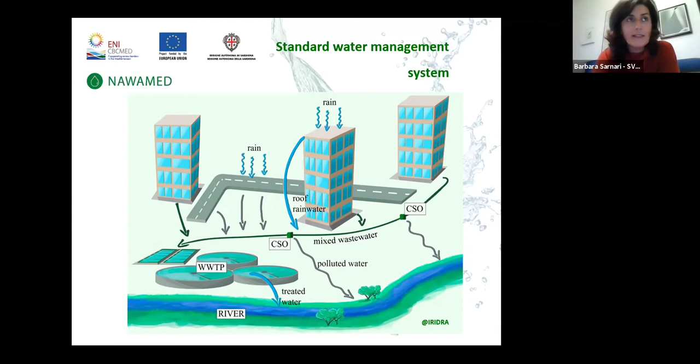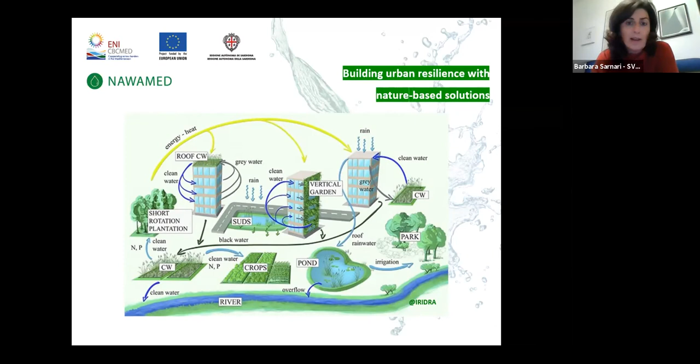So our final objective, which this project is just a part of, is to try to make this whole process more circular, reusing directly at the building and urban level the non-conventional water that is easily not so polluted, such as grey water or rainwater.

In particular, what we will try to demonstrate with the NAWAMED project is to reduce the use of potable water for secondary reuse, supplying at the project level about 9,000 cubic meters per year of non-conventional water that can be used, reducing the use of potable water.

The specific objective is to demonstrate the technical and economic feasibility of nature-based and low-cost solutions to treat and use non-conventional water resources in schools, universities, public facilities, or, as will happen in Lebanon, in a refugee camp. In this way, the recovered wastewater and stormwater will be reused for different purposes, including toilet flushing or irrigation, and therefore consumption of potable water for domestic use will be decreased.

In general, we can say that we will try to demonstrate that design and architecture can make a building an efficient water producer rather than a water consumer.

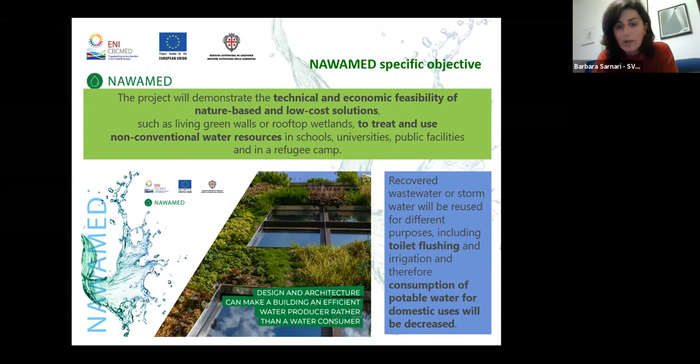How can we reach this goal? Further than the 8 planned real-scale pilot installations in Tunisia, Italy, Lebanon, and Jordan, we will also develop technical visits.

We hope also, during the installation of the pilots, not only at the end but it depends on the pandemic period, to have training workshops at technical level. We will also try to involve decision makers from the beginning through workshops and round tables that will involve both technical and political levels and all key stakeholders, in a participatory process aimed at boosting new policies for a more sustainable water management.

So we are not involving only the owners and managers of the 8 pilot sites, but also engineers, architects, construction companies, university students, and staff of local and regional authorities.

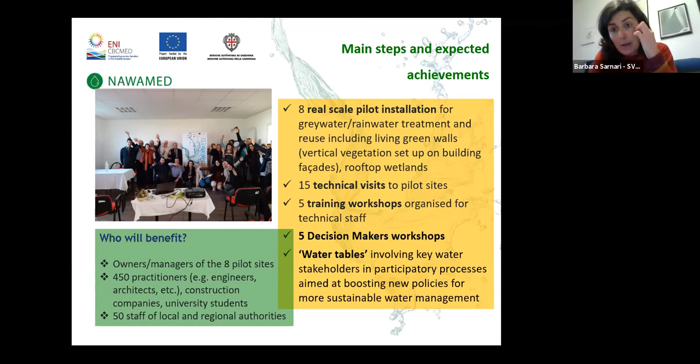In particular, the process that will involve policies is very important, because we have to imagine that a project alone cannot really change policies, but it can contribute to doing so.

It is important in this sense that projects not only work together over time, with continuity and consistency in this process, but also try to be included in a process that, through communication and networking between stakeholders and other ongoing projects, will try to foster national and regional strategies able to integrate the project results in a long-term perspective.

In this sense, during our project, it is planned to develop these water round tables at local and regional level to reach 6 final local and regional strategic documents.

But the feedback of these water tables will make us able to debate the same issues at the Mediterranean level and finalize a unique Mediterranean policy document to foster the inclusion of water demand management and non-conventional water resource measures at the regional and national policy framework.

This is very important because it's important to have a wider strategy and after to try to reach the local impact. In this sense, NAWAMED is also working to capitalize past experience and to cluster with other projects.

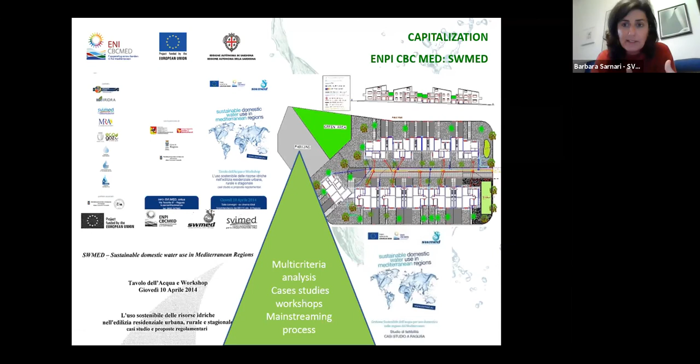Again, in a project that we just closed at the beginning of this year, another project that was about tourism management. So it's important also to understand, in the case of nature-based solutions, the holistic approach.

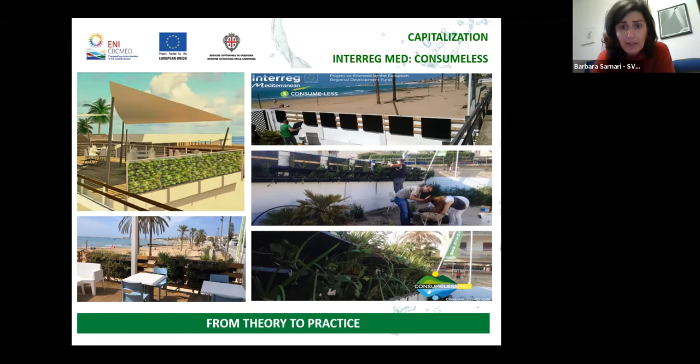We installed this green wall that you can see here in a beach resort to reuse the water of the shower for the toilets or for the garden, because green walls in particular can improve aesthetic, regulate temperature, and enhance biodiversity and air quality.

So it's very important, for example, in the case of nature-based solutions, to have this multi-sectoral approach and involve different stakeholders, because normally we find many projects on nature-based solutions about energy efficiency or biodiversity or air quality, but it's important also to try to integrate all these sectors and reach a global vision to really enhance the impact of the results.

As I was saying, we are developing also clustering activities, for example, with AquaCycle, another project in the same priority of the program, that is working to demonstrate an innovative technological solution for water management at domestic level. So we will try with them to organize activities, to share information, and also to put partners in contact.

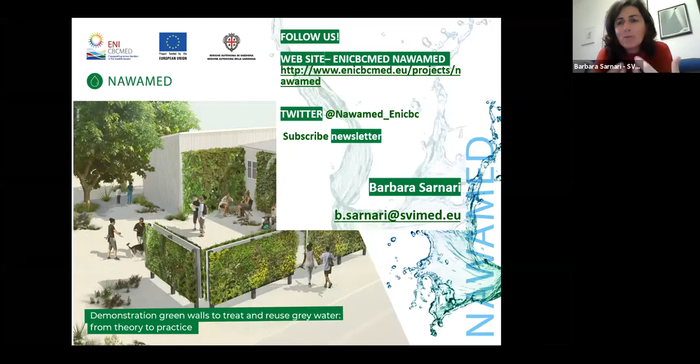I hope in this brief presentation to have brought to you the heart of the project. I avoided explaining each activity because I think that if you are interested, you can discover more by asking us, visiting the website, or contacting directly the partners, in particular the University of Jordan, about the activities. And please follow us on the website, on Twitter, and subscribe to the newsletter. For any question, don't hesitate to ask us. Thank you.

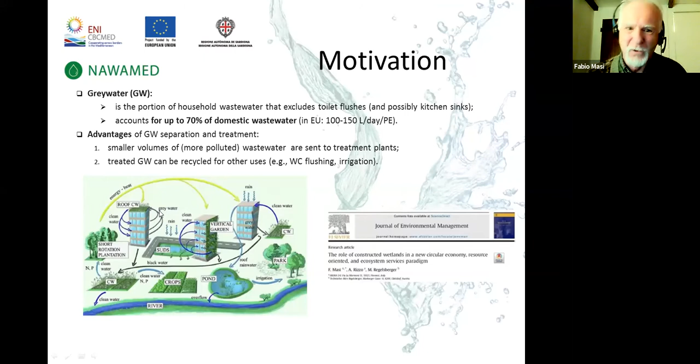The way was just to make use of unused surfaces. And these unused surfaces were not on the ground - they were on the roofs and on the walls. So we started studying this kind of installation, like green on the roofs and green on the walls. And that's what we are still studying nowadays, even in this project.

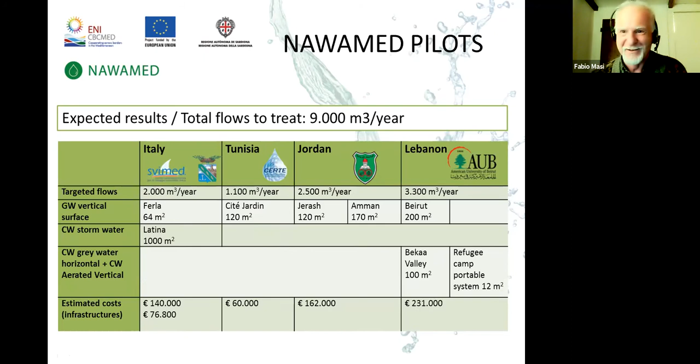So in all these kinds of installations, we are playing a lot with constructed wetlands, ground-based, with green walls, and rooftop wetlands. For the green walls, we are thinking of them because in a lot of situations in the urban structure, we don't have enough room for ground installations. So it's just a need of space, of surfaces, where to locate our treatment units.

But more than this, we can even think to add some beds. That's a quite characteristic aspect of designing nature-based solutions. For almost 30 years, we've been stressing the concept that it's very good to have multidisciplinary teams when dealing with this kind of technology, because you are biomimicking nature. You are trying to replicate whatever is happening in nature, which is a quite complex reactor. So it's quite difficult to understand exactly the degradation pathways of all the single molecules in a reactor where you don't have only a few elements to consider, but multiple ones.

You have a complete food chain in a nature-based reactor, meaning we have the bacteria, the protozoa, and the animals eating the protozoa, and so on. So you really have a lot of effects which are not so easily understandable. But nowadays, with the knowledge we have developed in some of these nature-based solutions, we are almost able to model by engineering models, using equations to understand how our reactors will behave immediately and over time - their evolution, their aging, and so on. So we now know quite a lot.

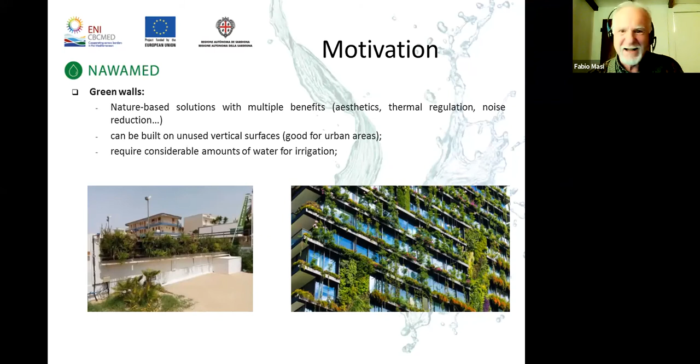So that's exactly the kind of functions we are looking for in a green wall, which are, as side benefits, a sort of effect on air pollution. And then we even have photosynthesis, so production of oxygen, and absorption, which is a temporary storage of CO2, and that's even another good effect, because we are storing CO2 and removing it from the atmosphere.

And then if we are creating insulation, we get a reduction in energy consumption, and even create a more efficient evapotranspiration in the area, which is then creating some microclimate effects, contrasting, for instance, the heat islands in the cities.

So we could even have urban planning where we install centralized green walls for recycling, let's say at block level instead of house level, if we have observed the recurrence of heat islands in that part of the city over time. One way to make cities more resilient is just to understand where these kinds of phenomena are going to happen or are already taking place, and then to install countermeasures like green infrastructures for mitigating these worst effects.

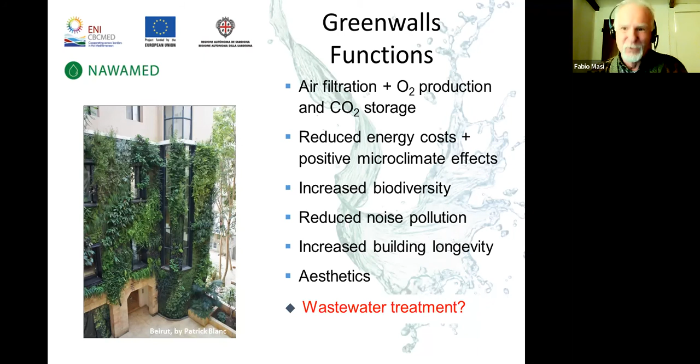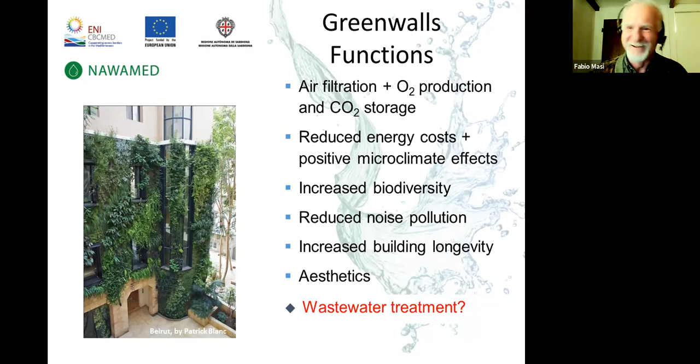In all this, we wanted to know, can we even treat wastewater in all this? Because the installation of a lot of these green infrastructures in the city needs water. Do you want to irrigate them with tap water? No, we want to instead produce a new source of water in the city. That is exactly the treatment of the water.

If another function could just be to diffuse Wi-Fi everywhere, I'm sure that in 5 years maximum with Chinese timing, we could have green walls treating greywater everywhere in the world. Unluckily we're still not able to do this, but we're working on it. The process will be slower, but just consider that if every house could install one of these green walls, we would save a lot of water, and that could really be a new green economy sector, a new market.

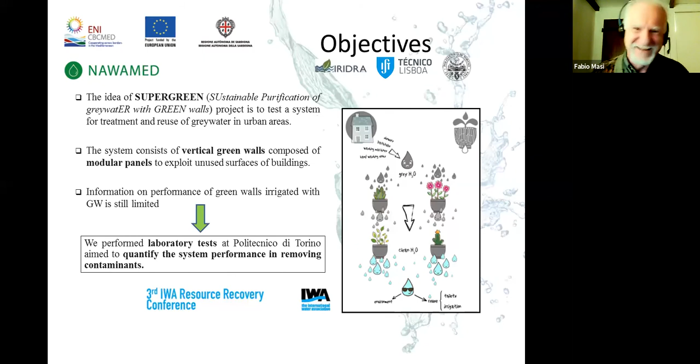There's still a lot to develop and a lot to play in this sector. A few years ago we did some research with the University of Torino, Polytechnic of Torino - that was the Super Green project. If you look at our Facebook page of Iridra, just yesterday most of the practical results, the numbers and figures obtained in this project were published. It's an open access paper, so you can download it, make citations and so on. Everything is reported there.

What we discovered is how much we can charge the systems while still having good performances - we've been able to reach the reuse limits in Italy, which has, I would say, the worst regulation about reuse of the planet at the moment, because it's very stringent, too stringent, and doesn't differentiate between the different kinds of reuse.

But in all this, the only thing the green walls are not able to do with the greywater is achieve complete disinfection, so the kind of reuse is still limited by this. If we don't want to add any other treatment, we won't be able to make noble uses of this effluent. But otherwise we can easily flush the toilet, for instance, even under Italian regulation, and go further with landscaping or irrigation of green areas.

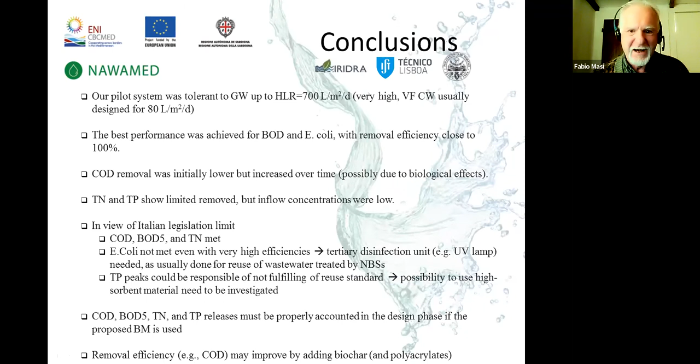We also researched the social acceptance of these kinds of schemes. What we discovered is that, when operating at block level with apartments close to each other, or even one floor over the other, it's much better and more socially accepted to mix all the effluent and then pump it back to the apartments, instead of having a defined source where whoever lives on the upper floor gives water to the ones living in the apartment below.

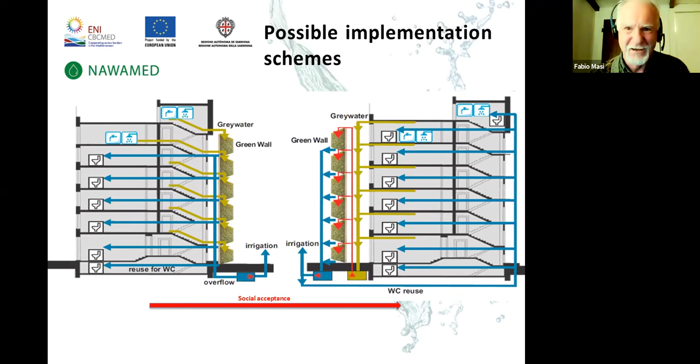What we discovered, in India, was that this kind of technology was not having big issues in terms of social acceptance. I hope it will be the same for the installations we are going to have also in this new project.

Just to give you a flash of what we are doing: in Ferla, in Sicily, there is a school which will have a green wall and a green facade. A green facade is exactly like a green wall, but it has a self-standing structure where some climbing plants grow - so the plants are still planted on the ground.

Yes, I have a few minutes more. Okay, if you maybe - because we'll have discussion after the other presentation, so hopefully it will be very fast, it can be finished soon. Yeah, I've just got these sketches.

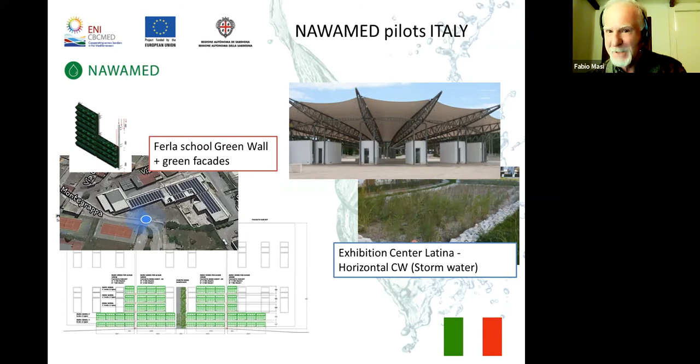In Latina we will have a horizontal, ground-based constructed wetland - that's the simplest technology for treating the greywater. In Lebanon, 3 pilots: one will be a green wall, and then a horizontal flow constructed wetland.

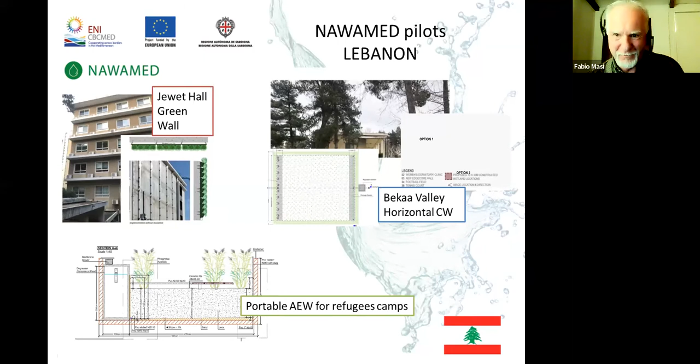A nice example will be this one at the bottom, which will be a portable nature-based solution - it will be contained in a container, and it's a quite compact and efficient constructed wetland which has some aeration on the bottom, making it much more efficient. It's consuming energy, but it's more efficient. That's the system we've designed, and it's now going to be realized in Tunisia at the Cité Jardin demonstration site.

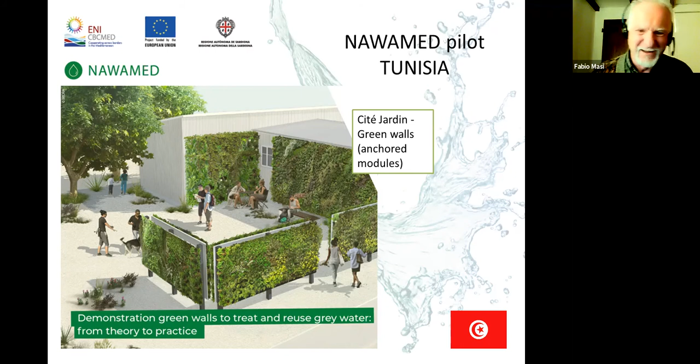What you can see here is that we can install green walls even in self-standing structures, creating landscaping design. In Jordan we have exactly these 3 technologies: the green facades, the roof wetland, and the green wall.

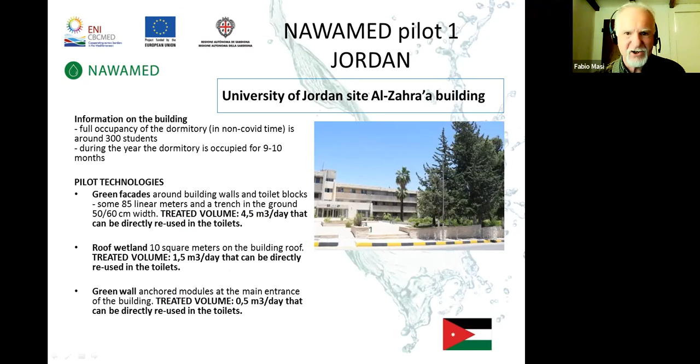So those are the daily flows that will be treated and then reused, mainly in the toilets for flushing. It's the dormitory of the university. And so that's exactly the design that has already been made of the green facade.

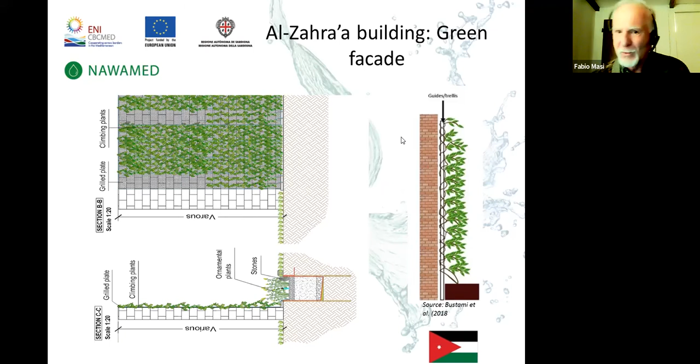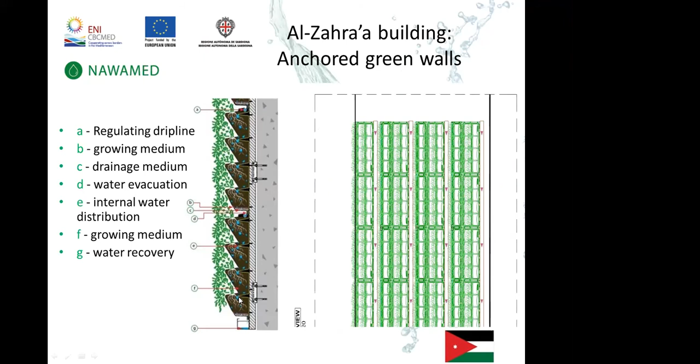You see here a self-standing structure, so the plants are not putting their roots directly in the wall. And then we have also the anchored green wall. Here the water is instead flowing inside these pots. In the former one, the water was staying just at ground level.

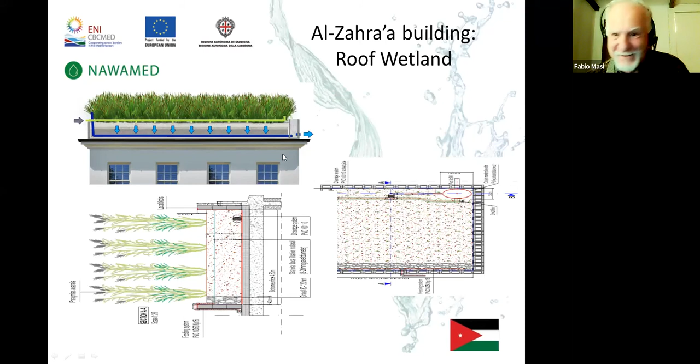And that's the roof wetland, which is an installation over the roof. Obviously this one has to be tilted 90 degrees. It's a sand layer where bacteria are living, filtering the water, and it's exactly the same in the green walls also.

Still in Jarash municipality and the Zarqa Cultural Center Park, the foreseen technologies are both green walls and green facades. Still, the design here has just started, so I have not much more to add.

And with this, and with 2 minutes of delay, I'm ending up. Many thanks. Ready and available for every kind of questioning.

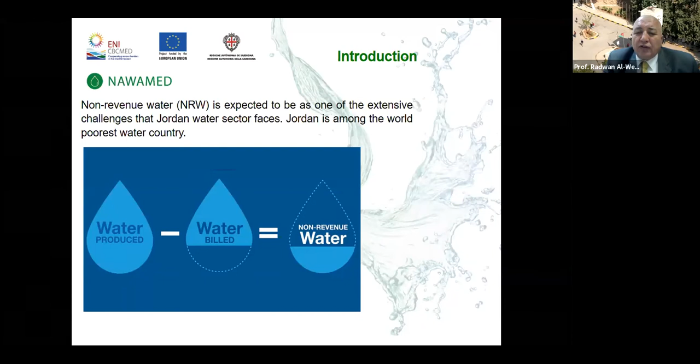Non-revenue water is defined as the difference between water produced and water billed that is retained. This non-revenue water can be divided. It's a major problem in Jordan, as on average, non-revenue water in Jordan can reach 50% most of the times in most areas.

As you see, the study area is Yadoudeh. I have to be fast because I have a master thesis discussion supposed to be at 6, so I postponed it 10 minutes. So I have to finish in 10 minutes - you'll have to pardon my quick slides.

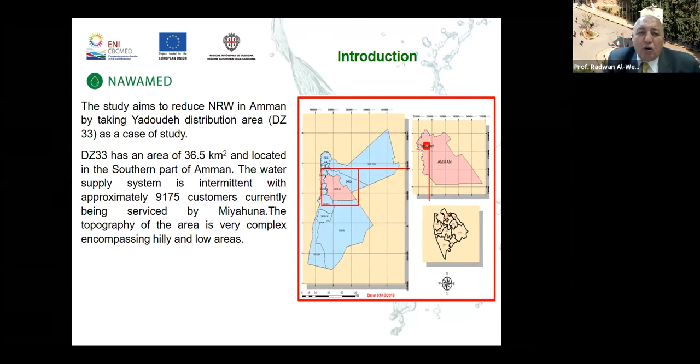The aim of this project is to reduce non-revenue water in this distribution zone, which we call Yadoudeh. Yadoudeh is part of Amman, south of Amman, with intermittent water supply and an area of 36.5 square kilometers.

Now we have to assist in this project. We want to assess the existing non-revenue water, quantify the real losses and apparent losses in the Yadoudeh distribution network, and recommend non-revenue water management for this pilot area, which can be extended to other parts of Amman.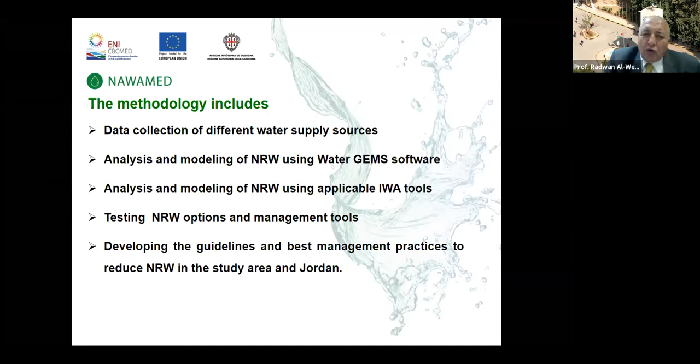Our methodology includes data collection for different water supply sources in the study area, analysis and modeling of non-revenue water using a software developed by Bentley called Water GEMS, which is a WaterCAD combined with a GIS system, analysis and modeling using International Water Association tools, namely the AWWA spreadsheet. We have to test several options to reduce non-revenue water, and at the end develop guidelines for best management practices to help decision makers in reducing and managing non-revenue water.

In the modeling system, we have main sources. We have to define the elements of the system, which are reservoirs, pumps, towers. We also have to identify the elements of the network, which are main connections, valves, pressure reducing valves - they are all in a shapefile.

We have to have the borders of the area, because you have to isolate the area so that you can manage the non-revenue water and quantify it. And we have to identify the number of customers within this zone, what are the demands, and the topography of the region, because this is part of the data needed for the model.

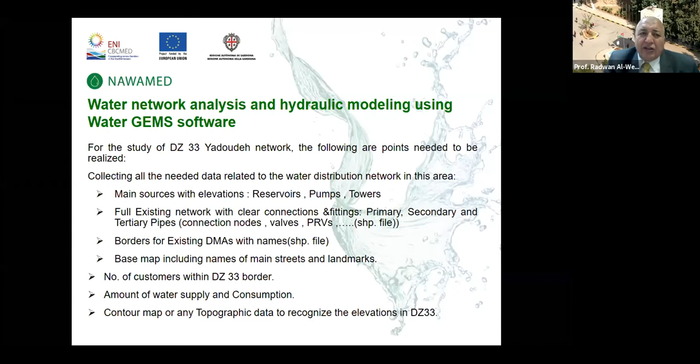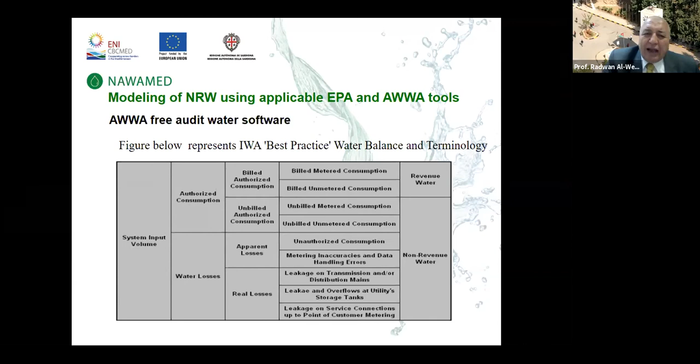This is further explanation of non-revenue water. Non-revenue water includes water losses, which are real losses—in Jordan, about 20%. We have apparent losses, which include unauthorized consumption or metering errors, and unbilled authorized consumption, for example public parks or areas without a billing system. The total of these elements is the non-revenue water, while the small part on top is revenue water, which is billed and paid back to the water authority.

We also have to identify the economics of several interventions and options that will enhance the reduction of non-revenue water, taking into account the other options.

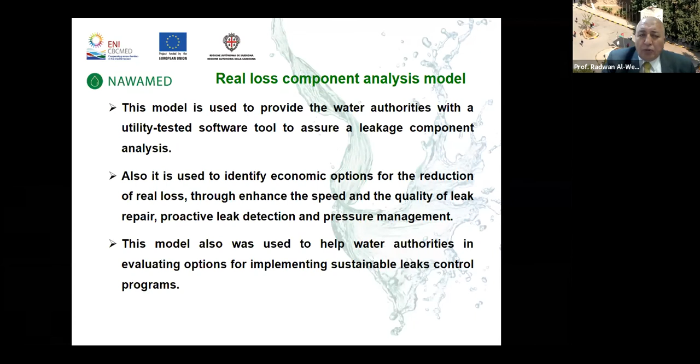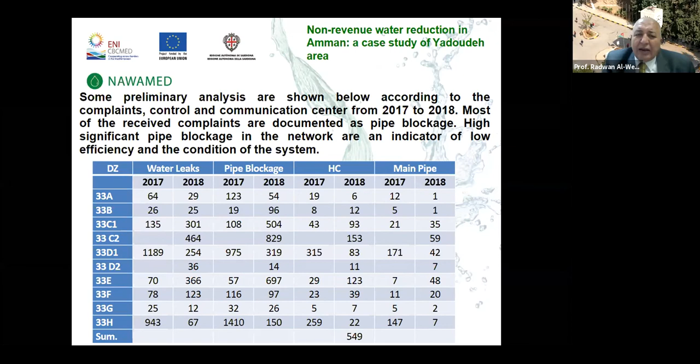Let me go first to the results. These are part of the survey we have in zone 33. We divided this zone into 8 networks originally. This data shows the water leaks for years 2017 and 2018: pipe blockage, house connection failure, and main pipe failure. You can see we have a very high number of failures within the system.

We identified and classified the water leaks per pipe diameter and pipe material. Most of the pipe breakage is within less than 2 inches to 3/4 inch diameter, mostly in house connection areas or minor streets. The mains don't have major issues. Luckily, failures in these smaller pipes don't cause as big a loss compared to loss in big pipes.

We've also seen that polyethylene pipes have the highest complaints and breaks within the system. Although it has been recently used, ductile iron, steel, and galvanized iron have been used for tens of years, but their failure rate is less than the polyethylene pipe, the PE pipe.

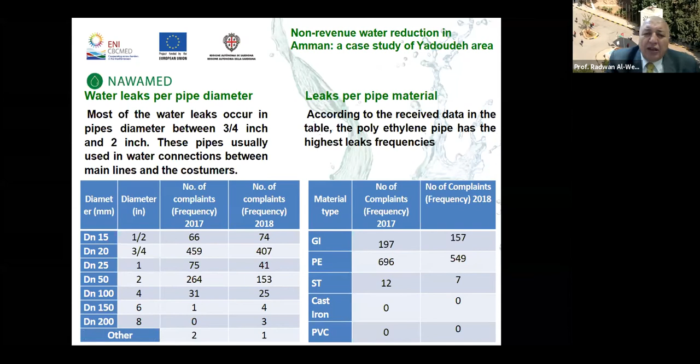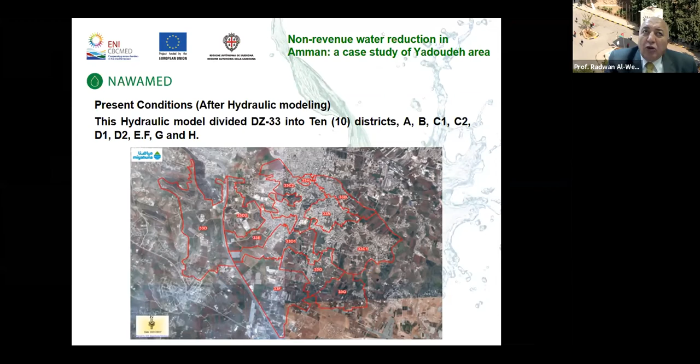Originally, the zone was divided into 8 hydraulic districts, A through H, fed by Yadoudeh Reservoir and Tower. We modeled that, then did an intervention by adding 2 different zones, making 10 zones. Zoning means that by introducing pressure reducing valves, you can play with the pressure and reduce the leakage in the system.

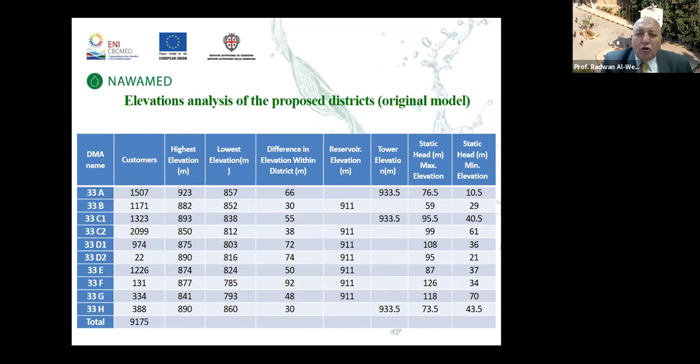This is the 10 zones' characteristics: how many customers and the area of each subzone. In the hydraulic model, as I told you, we use WaterGEMS. We entered all the data needed for this model: hydraulic data, topographic data, demand data, and we can see the results at the end.

If we have the baseline, which is the 8 zones, in the original the leakage was higher, in the 50s. If we do our intervention by hydraulic isolation of 10 zones, the non-revenue water percent was reduced to 36%. If we add water metering replacement—replacing about 1,000 mechanical water meters with ultrasonic meters, which are more sensitive to low flow—the non-revenue water was reduced to 27%.

And if we just do rehabilitation and leak detection—this is visual inspection for breaking lines and illegal use—it can be reduced to 25%, 24.6%, which is the target of Miyahuna, the water distributor in Amman, by 2025.

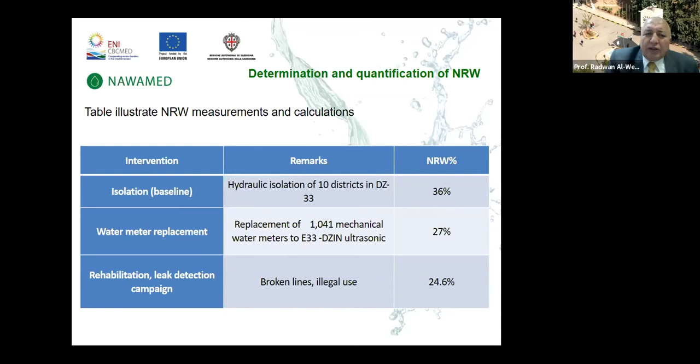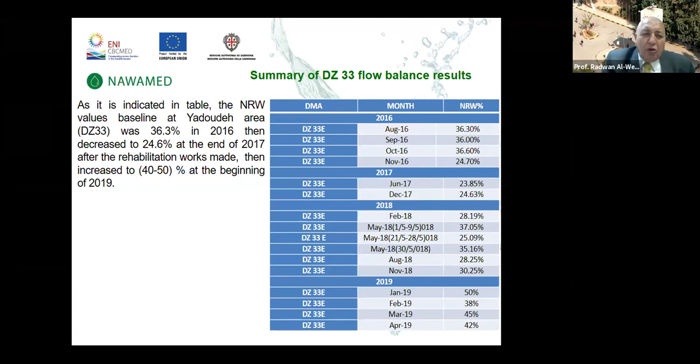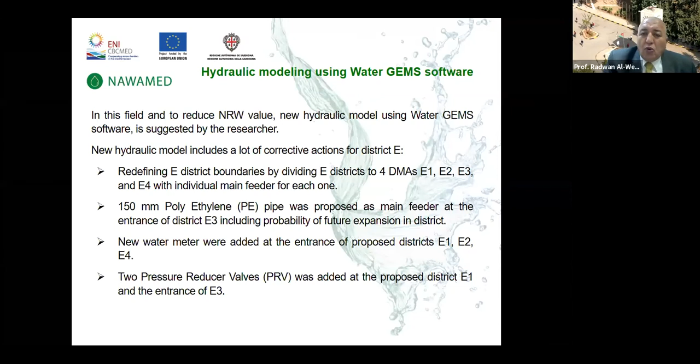This is a water balance, flow balance. For that we use the AWWA spreadsheet as an auditing sheet for the zones. A further intervention was done by redefining zone E, a problematic area, into 4 additional zones. We introduced a 150 millimeter PE pipe as a main feeder to E3, and new water meters were added to E1 and E4—these are the problematic, high pressure zones.

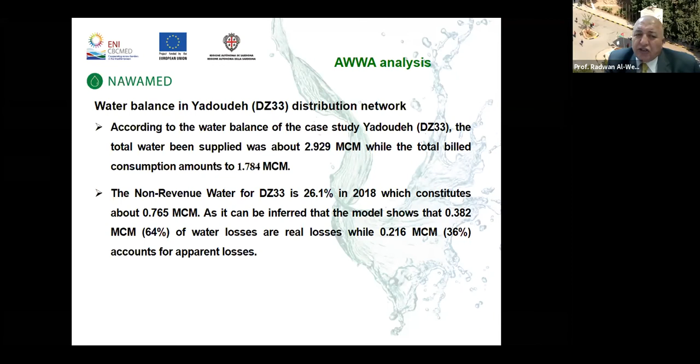We noticed, according to water balance, that we supplied DZ33 with 2.9 million cubic meters, and what was paid for was 1.78 million. So non-revenue water accordingly was 26.1% in 2018. As it can be inferred, the model shows almost 64% of water losses are real losses, while the other 36%—part of the non-revenue water—are apparent losses, meaning illegal connections and errors in metering.

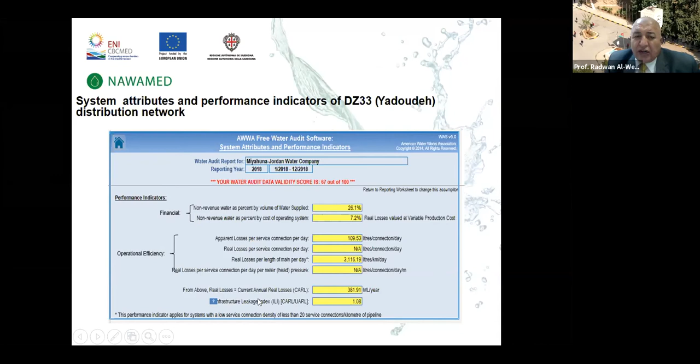This sheet is the AWWA water audit software that we used in water systems, so that we can identify the non-revenue water, and also quantify the annual losses and real losses in currency and in economic terms.

This is a summary of what we have said before in the model.

In conclusion, for the baseline, the non-revenue water was 36.3%, and it was decreased to 24.6% at the end of 2017.

After rehabilitation work, it increased. This is a USAID project - they reduced it, but it increased to 40-50% at the beginning of 2019. This is because they were not able to isolate the whole zone. If you introduce a new system without isolating the old system from the new, then your systems are mixed together, and this will definitely increase the non-revenue water.

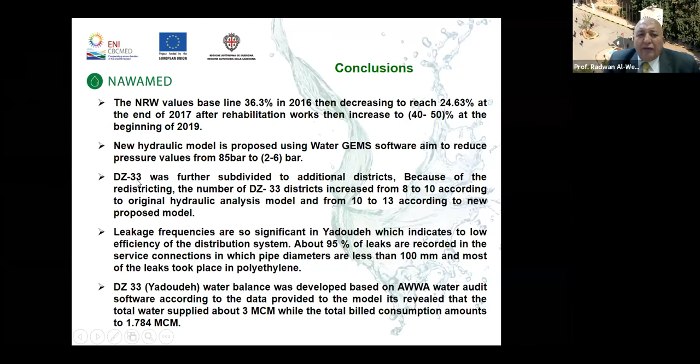Of course, the model was developed. Let me go to the final conclusion. The non-revenue water was about 0.75 million cubic meters per year. Part of this, as said, 2/3 of these losses were real losses - leakage - whereas 36% was apparent losses. The component analysis shows that the main pipe...

Total annual reported losses were very minor compared to the service connection. The estimated cost for implementation of an alternative pressure management policy to reduce the pressure from 8 bar to 5 bar was $4 million. The simple payback period for implementing this project is about 2.7 years.

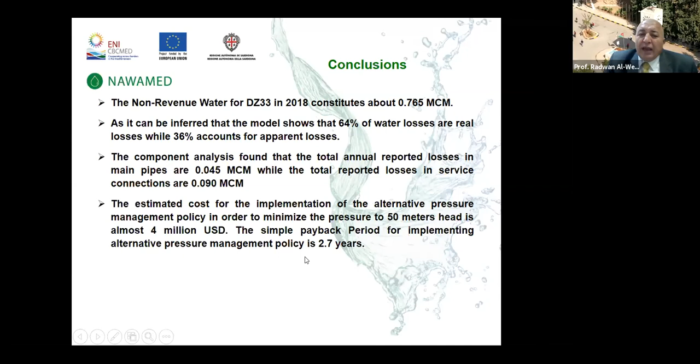In fact, pressure management seems to be very powerful in reducing non-revenue water, especially in hilly areas like Amman. I think also...

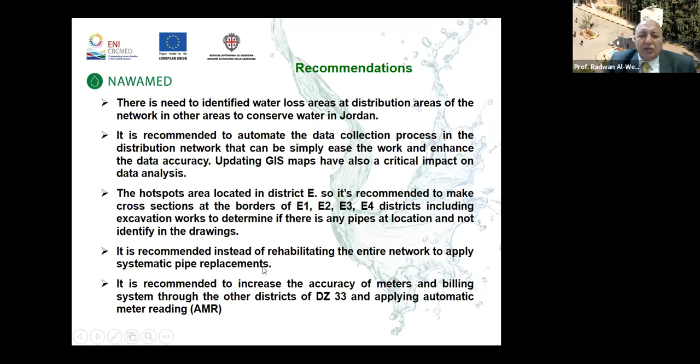It's recommended, instead of rehabilitating the entire network, to apply systematic pipe replacement. It's also recommended to increase the accuracy of the meter and billing system, as applied in other districts through automatic metering reading. Miyahuna, the water authority and service company that provides water to Jordan, is working on this in most of the Amman area. Thank you very much for your kind attention.

And again, I'm sorry for going fast.

Thank you, Dr. Radwan. Thank you.

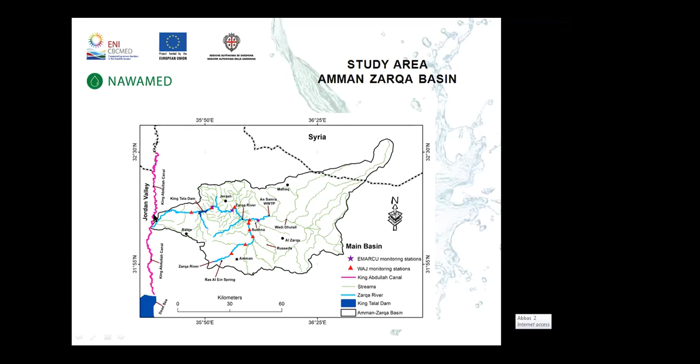I would like to talk about the irrigation system between Amman Zarqa Basin and the Jordan Valley. The Zarqa River flows from within the basin, and this water is stored behind King Talal Dam, then flows to the Jordan Valley. Here there is a big wastewater treatment plant, the Samra wastewater treatment plant, which treats effluent estimated at about 250,000 cubic meters per day, and now its water is mixed with Zarqa River and it goes to the Jordan Valley.

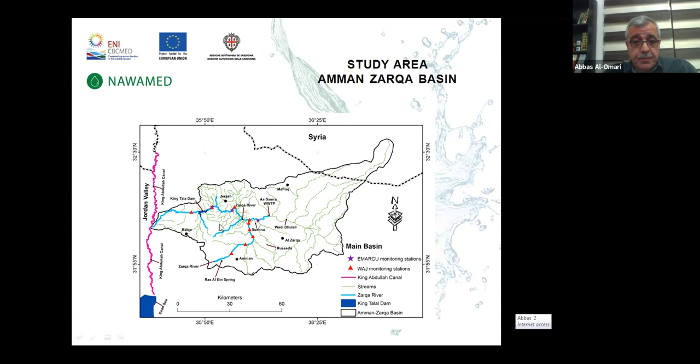Now this is the river. The Zarqa River has undergone dramatic environmental degradation. It used to be a real river in the past, maybe in the 50s and 60s, but now it's almost dry, and it's a creek that flows only during winter. It does not flow during summer, only after rainfall events.

So the objective of this work is to identify pollution sources to the Zarqa River, identify and quantify pollutants from each source, and also to observe and measure river flow and assess the impact of the pollutants on the river water quality and its use.

So the methodology: river survey. We first started with the river survey, and also collected quality data about the river. We have two sources of existing data: one from the Environmental Monitoring and Research Central Unit, EMARCU, and RSS, the Royal Scientific Society, and also from the Water Authority of Jordan. Another source is grab sampling we did at certain locations. Then the data was analyzed and conclusions made.

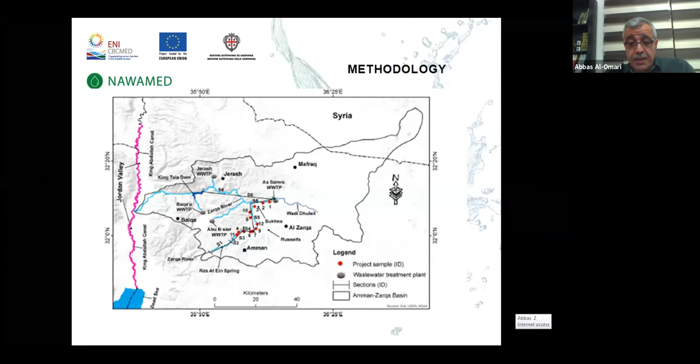This figure shows that in the basin along the river there are 4 wastewater treatment plants. The main one is As-Samra wastewater treatment plant, which treats about 90% of the wastewater generated in Amman city and Zarqa city. There are 3 other minor wastewater treatment plants, in the range of 3,000 to 4,000 cubic meters per day: Jerash wastewater treatment plant, Al-Baqa, and Abu Nseer. But these are very minor compared to Samra wastewater treatment plant.

We also have power generation stations along or close to the river, and also landfills - we have 2 landfills. And we have wastewater pumping stations - 2 of them, which are too close to the river: one in Ain Ghazal and one in West Zarqa. The flood from these 2 wastewater pumping stations is also a major source of pollution to the river.

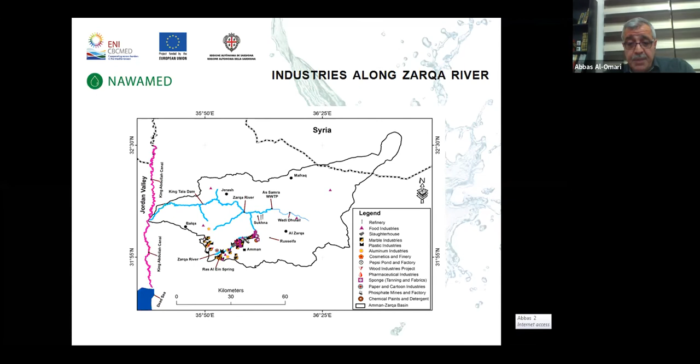Along the river also we have too many gas stations. And these gas stations can actually be a source of leakage from the storage tanks, which can also be a source of pollution to the river.

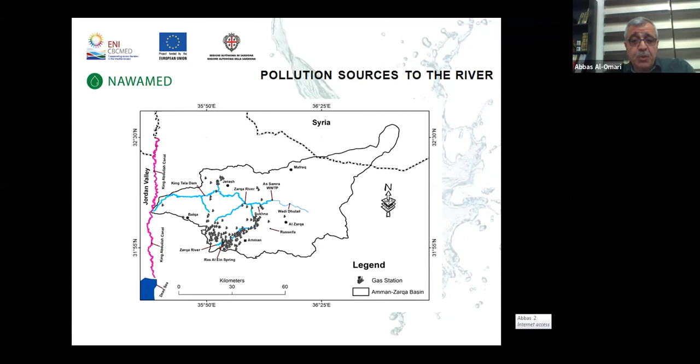EMARCU, they have 3 automated stations along Zarqa River. They have actually 13 automated stations along surface water courses in Jordan, 3 of which are located along Zarqa River. One station, station number 8, is downstream of As-Samra wastewater effluent. Station number 10 is close to the King Talal Dam inlet, about 2 or 3 kilometers from the inlet.

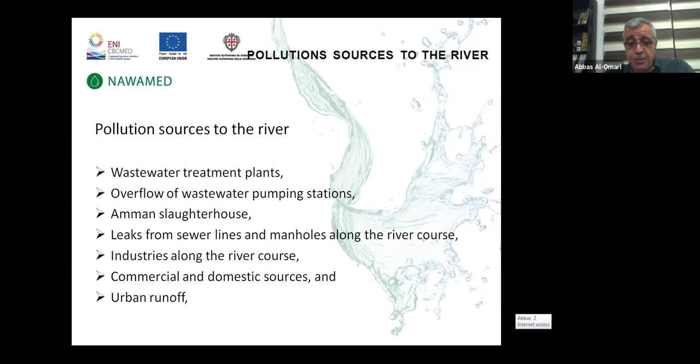Industries, as I said, are also a main source of mainly heavy metals to the river. Commercial and domestic activities also are a main source of pollution to the river. Urban runoff is also a main source of heavy metals to the river. So these are the main sources of pollution to the river, and these are the main pollutants that reach the river from these sources: solid waste, organics and solids, nutrients, and heavy metals.

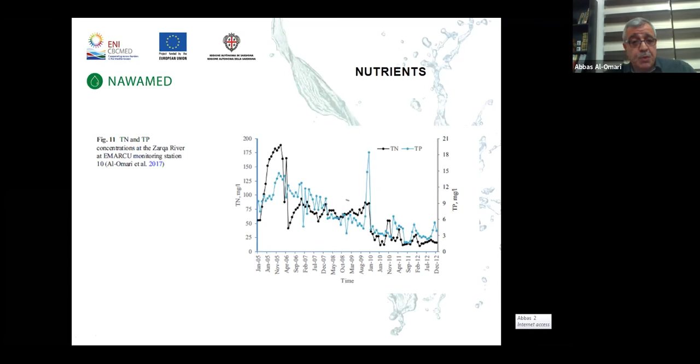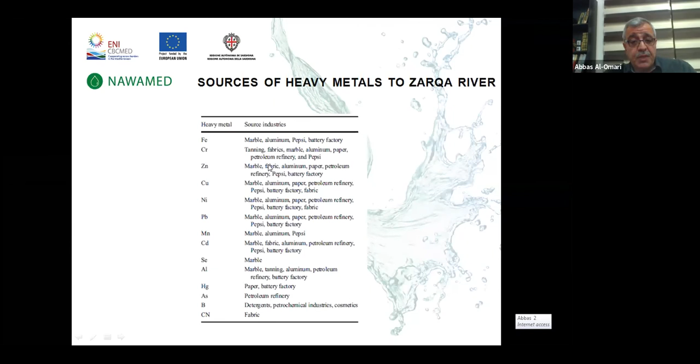Here we see a summary of all the heavy metals that exist in the river, and these are the industrial sources of these heavy metals. For example, zinc comes from the marble industry, fabric, aluminum, and paper industries. All these industries are a source of zinc, and so on for the other parameters.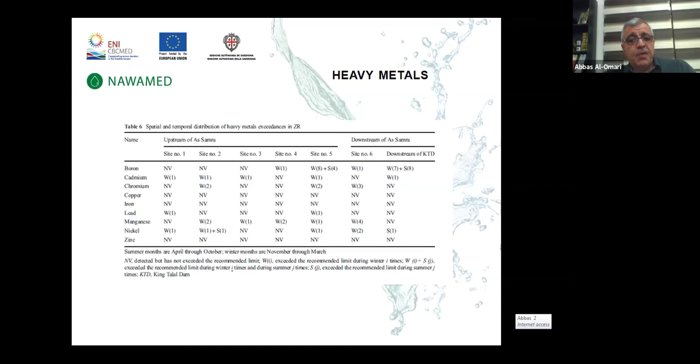NV means the metal was detected but not violated. W means the element was violated, for example once during winter. S means the parameter was violated, for example 8 times during summer. This shows which parameters were violated, the frequency of violation, and whether it occurred during summer or winter. From this table, we see that most violations occurred during winter, meaning they are associated with runoff rather than industries. Urban runoff is a main source of heavy metals also.

This table shows statistical data about the samples, the number of samples, and their location, whether upstream or downstream of Samra. These are for the heavy metals, for the Water Authority of Jordan samplings, and for the grab samples. It shows the number of samples - for example, we have 121 samples for boron, 68 of which were upstream of Samra, and so on. It also shows the number of exceedances and their spatial distribution, whether upstream or downstream of Samra.

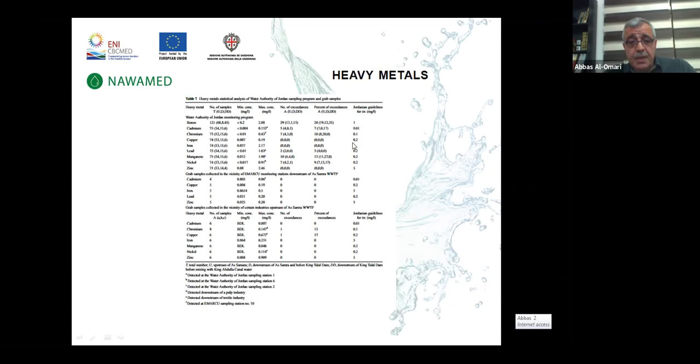Here it shows the Jordanian standards for irrigation. So the violations are based on the Jordanian standards for irrigation.

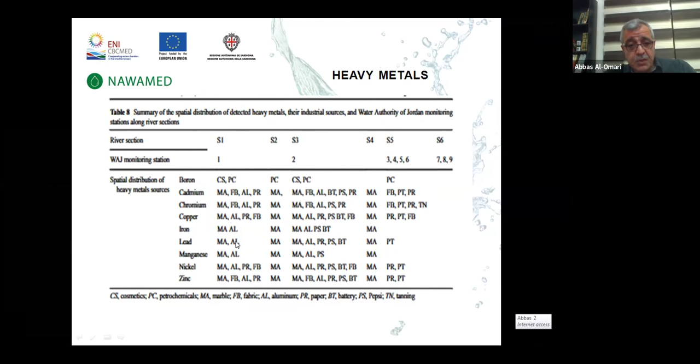This table shows a summary of the spatial distribution of detected heavy metals and their industrial sources in every zone. We have 6 sections, and in each section we see the possible source of pollution for each parameter. For example, for boron in section 1, CS means cosmetics and PC means petrochemicals. So the two main sources of boron in section 1 are the cosmetics industry and petrochemicals. These are the other sources for the other parameters in each section.

Now for the river flow, those familiar with the river know it is almost dry during summer. This is because of the over-abstraction of the groundwater underlying the river to satisfy domestic needs, which causes the springs that feed the river to become dry - this is the main reason the river is dry. The river flows during winter after rainfall events. Downstream of As-Samra, the flow consists mainly of As-Samra effluent during summer, and during winter it is a mixture of flood water and As-Samra effluent.

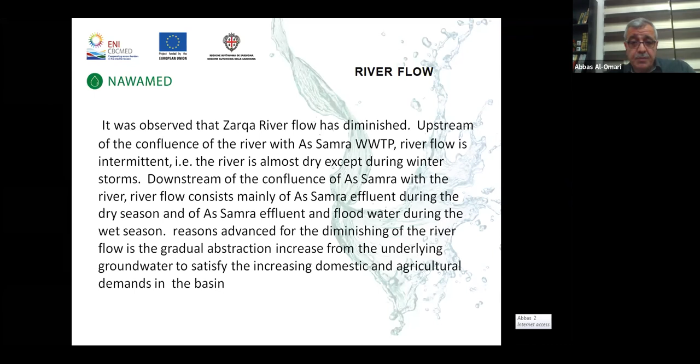So the main conclusions: the sources of pollution to the river have been identified. The main sources of organics and nutrients are As-Samra, the Amman slaughterhouse, overflow from sewer lines, overflow from wastewater pumping stations, and runoff from farms along the river. Heavy metals along the river have been linked to their sources, with industries and urban runoff as the main sources of chemicals.

After comparing the water quality with the Jordanian criteria for irrigation, the river water is suitable for restricted irrigation upstream of the King Talal dam, meaning trees can be irrigated with this water, as well as crops that are not eaten raw. Downstream of Samra and the King Talal dam in the Jordan Valley, because the water is mixed with fresh water from the King Talal dam, the river water is suitable for unrestricted irrigation.

This work was done within a project funded by the Scientific Research Support Fund in Jordan, and it lasted from 2010 until 2014. We have partners from the University of Jordan, Dr. Jawad Al-Bakri and Dr. Muna Hindiya, who was the director of the Water Authority of Jordan at that time, and also partners from the Royal Scientific Society of Jordan. Thank you for your attention.

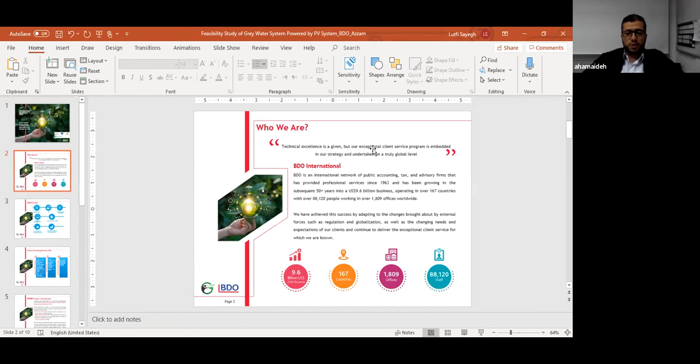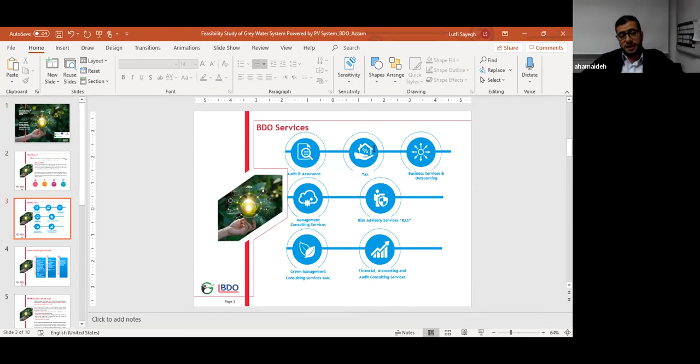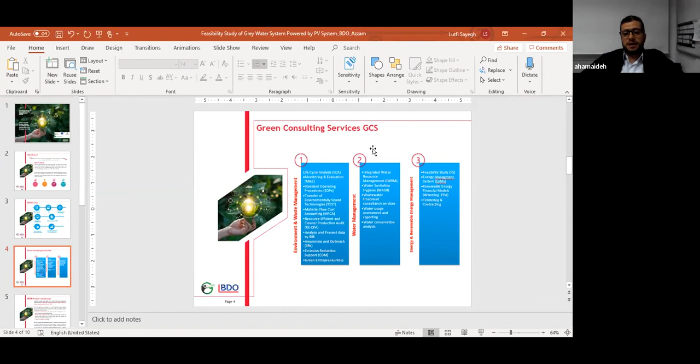Firstly, I'm going to present myself and my company. I'm Azzam Hamaideh, the Director of Green Consulting Services at BDO Jordan. BDO Jordan is one of the international companies working in audits and advisory services, with more than 1,800 offices in more than 167 countries worldwide. We do a lot of services such as audit, tax, business services, advisory, management consulting, risk services, accounting services, training, and last but not least, green consulting services. Since I'm director of the green consulting services, just one slide about these services. We have 3 pillars: the first is environment and waste management, the second is water management, and the third is energy and renewable energy management.

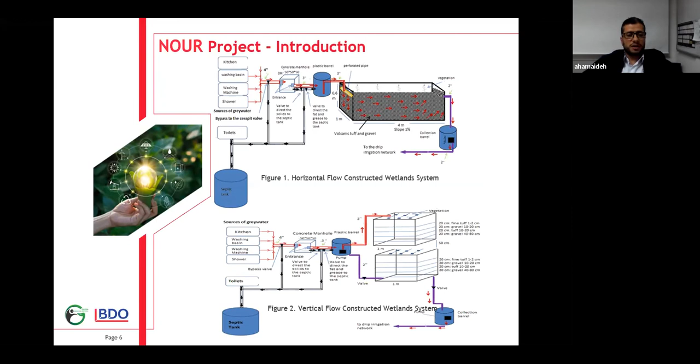According to that, BDO was contracted by World Vision to do a feasibility study and technical review of these installed systems. We went there and visited all these houses, and checked all these systems technically and financially, in order to judge whether they were feasible, technically sound, and economically viable or not. The systems were of 2 types: the first one is horizontal constructed wetland, the second one is vertical constructed wetland. We checked all components, and now I will present the results and the main findings of our study.

After investigation and checking all these systems, all vertical designs of the grey water system were working well, while the horizontal design had some problems, particularly with bad smell from time to time that disturbed the owner of the household. At the same time, the design itself was easy to operate without any technical issue.

On the other hand, some of the BOD and COD results did not comply with the standards. Dr. Abbas Omar already mentioned some standards about irrigating some plantations, trees or fruit, in order to be used for households. Some of the results were not compliant with the standards.

The PV system, since the grey water systems and the PV system are already linked together to power the systems, worked well, except for one system with a technical issue. It's not a major problem, and the household does not complain about any technical operation problem with the PV system.

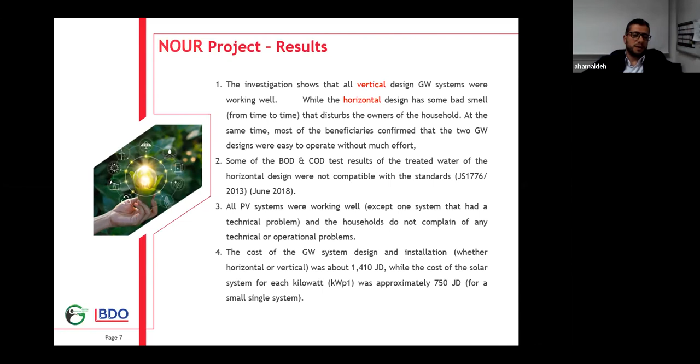This result was from 2018. Now maybe it will be cheaper than this number. However, for a small system, for example 1 or 2 kilowatt peak, the cost has to be higher than for big systems.

About the average of benefits, we tried to calculate the benefits, not just feasible direct benefits like cash, for example. We tried to calculate the environmental benefits and social benefits with a very complicated equation in order to come up with the real number. After the calculation, we came up with two main categories.

The first one: some houses already do desludging of wastewater. Some cesspools already desludge the water from time to time, but other cesspools do not desludge anyhow, because maybe the design of the cesspool already infiltrates to the groundwater without any desludging. So we have two types: houses that already do desludging, and a second type that does not do any desludging.

For houses that already do desludging, the benefit was around 330 JOD yearly. For the second type of houses without desludging, the benefit was around 200 JOD. But the benefit varies from house to house, so the reflection of economic feasibility of this system may change from house to house.

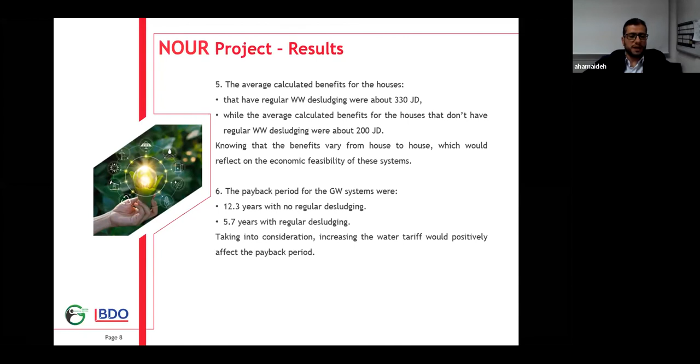The second point is that the owners of households were willing to have a PV system in their houses without any support, without any donor agencies, by their own. While for the grey water system, they are not willing to have it because of some technical issues and the payback period being very long, and they don't have the effort to do it for grey water systems in their houses.

We did some market research about enhancements in order to increase and convince people to have grey water systems in their houses. But according to our results, the market for upscaling such systems is not acceptable for people on their own without any support, fund, or support from governments. So we need some support from government in order to enhance or convince them to have such systems.